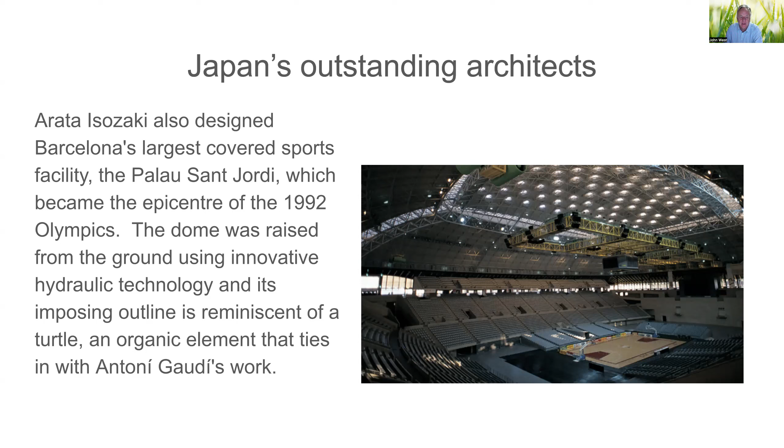Now let's move on to Arata Isozaki, another Japanese architect. He designed Barcelona's largest covered sports facility, the Palau Sant Jordi, which became the epicenter of the 1992 Olympic Games. The dome was raised from the ground using innovative hydraulic technology, and its imposing outline is reminiscent of a turtle, an organic element that ties in with Antoni Gaudi's work.

Now, someone else who's interesting is Kengo Kuma, another one of Japan's leading architects. He designed the stadium for the 2020 Tokyo Olympics, which of course was held in 2021 because of the coronavirus. Let's listen to some of his thoughts.

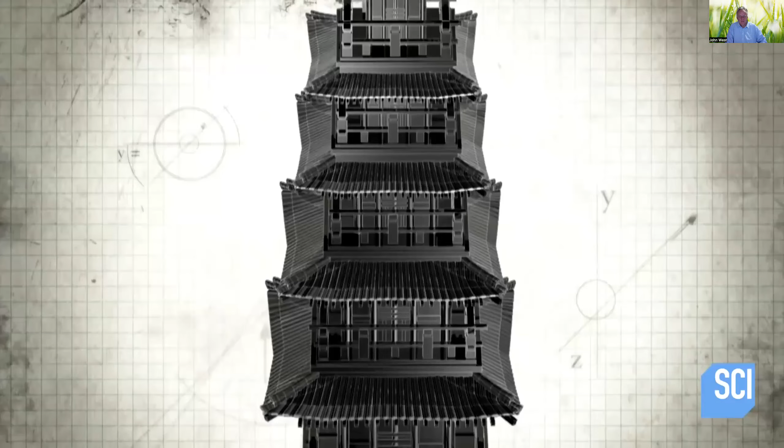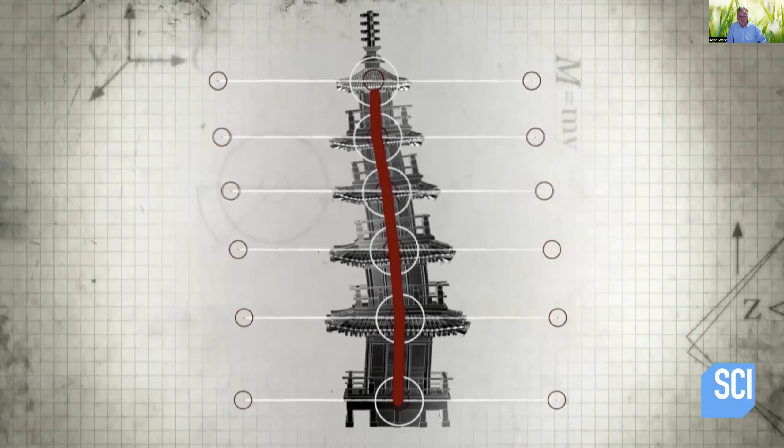In the Tokyo area, big earthquakes occur, and that is a challenge for us to design such a high-rise structure. To stabilize the tower, engineers rely on fluid dampers developed during NASA's Apollo space program and from something closer to home. The engineer's first step in controlling the shake of the tower centers around an ancient earthquake-proof structure called a Japanese pagoda. A flexible earthquake-dampening central pole called a shinbashira stabilizes this tiered wooden structure.

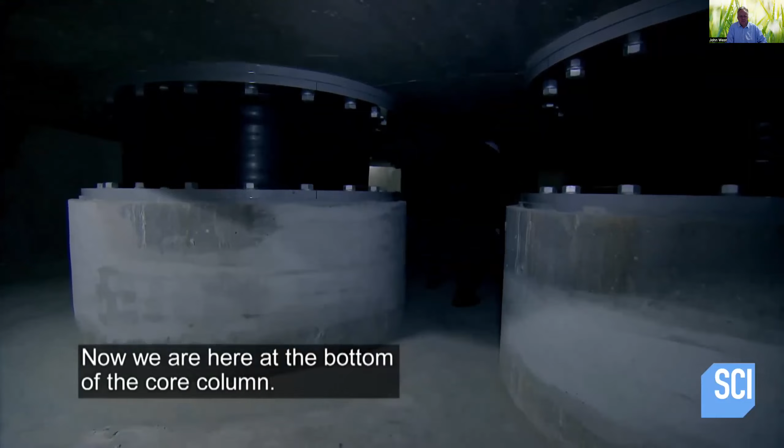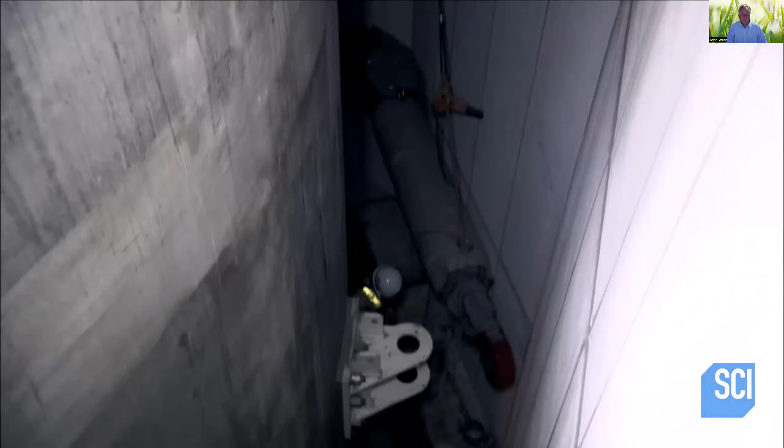Skytree's engineers are emulating this ancient technology, creating an enormous 1,200-foot concrete column set on 6 giant rubber bearings. We are here at the bottom of the core column. I came up with the core column system because there is a shinbashira in Japan. Sandwiched between this mass and the tower's steel structure lies the Apollo-inspired fluid dampers.

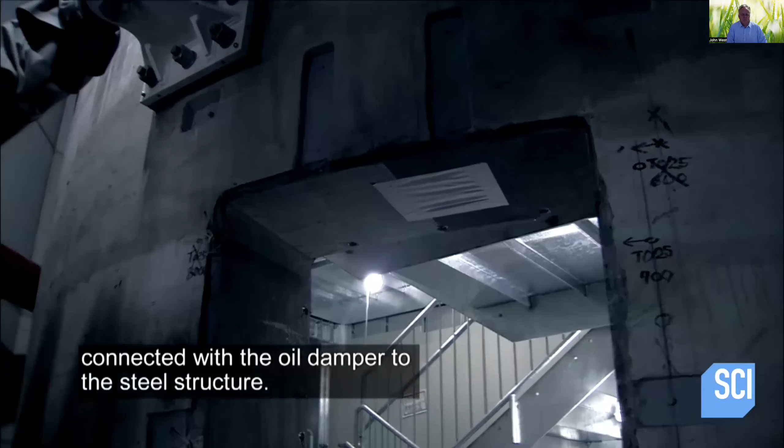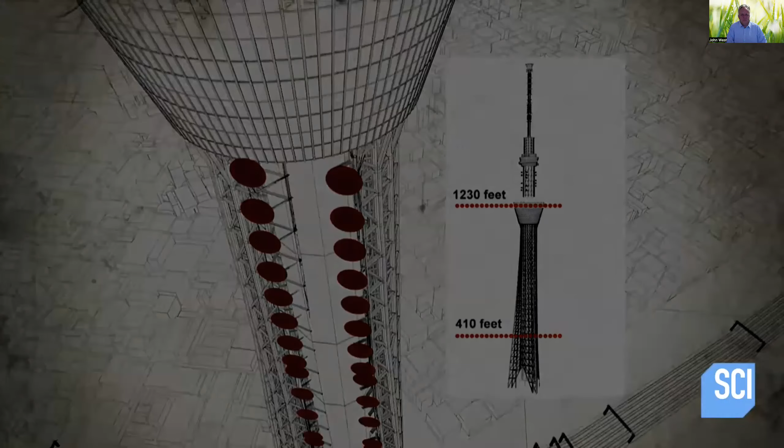The upper half of the core column is connected with the oil damper to the steel structure. Situated between 410 and 1,230 feet, the series of fluid dampers control the movement of the freestanding 11,000-ton concrete core and the steel exoskeleton throughout a seismic event. During the earthquake, the core column is designed to shake just a little bit slower compared with steel towers. That condition is the reason why the core column system reduced the vibration of the Tokyo Sky Tree.

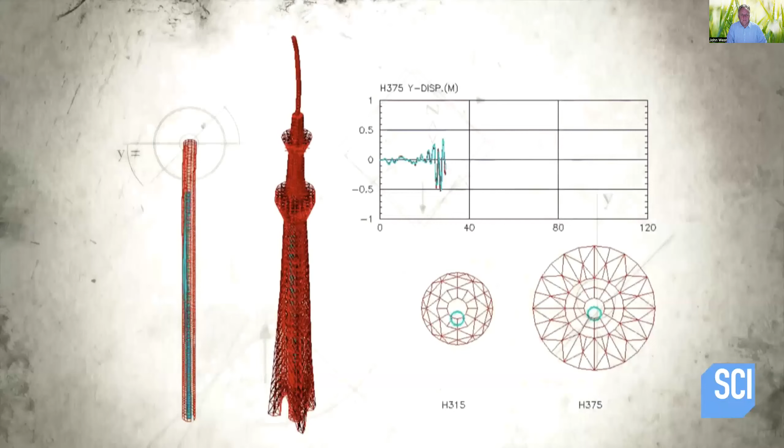The different vibration cycles of the central column and steel frame can counteract the vibration of the entire tower. If the oil damper isn't installed, the core column will collide with the steel structure and the core column will collapse.

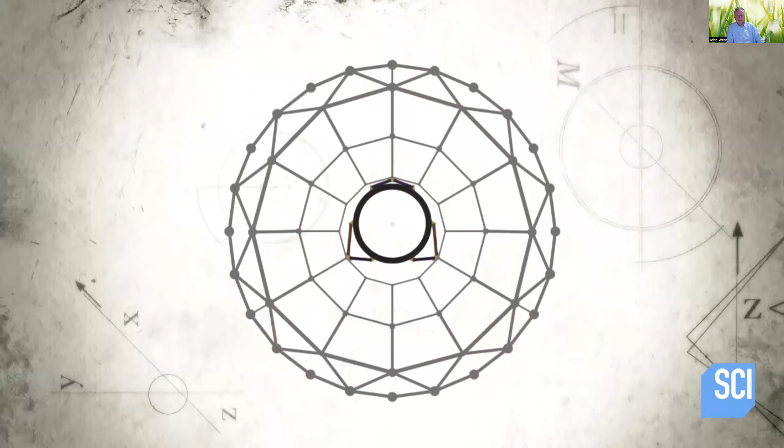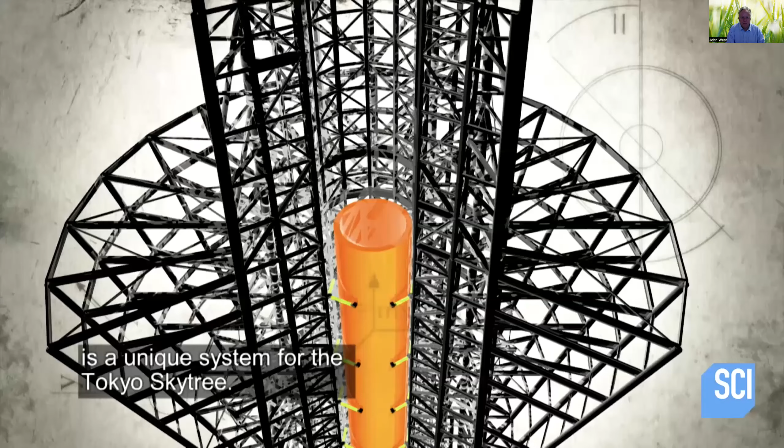The system is so effective it reduces an earthquake's vibration by 50%, meaning Skytree will survive Tokyo's most severe seismic activity, the likes of which is only expected once every 1,000 years. The vibration control system is a unique system for Tokyo Skytree, the first one in the world.

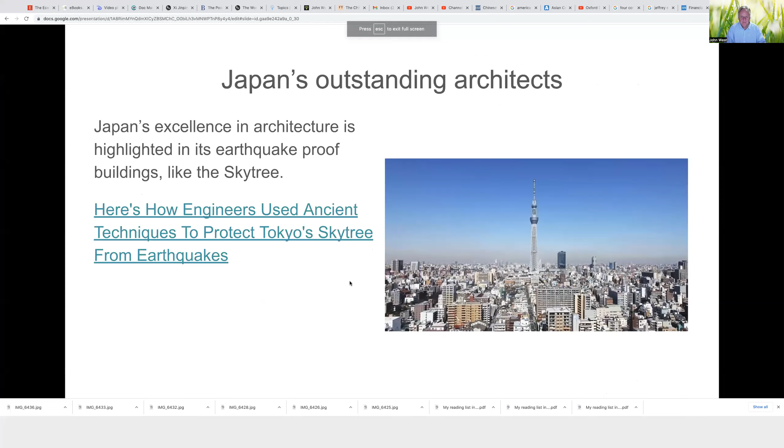So let's have another look at some...

Next in Tokyo, Japan, we'll take a look at the construction site of Tokyo Skytree, the tallest broadcasting tower in the world. Our correspondent spoke with the designer of Tokyo Skytree on how it was built to resist even the strongest earthquake in the country.

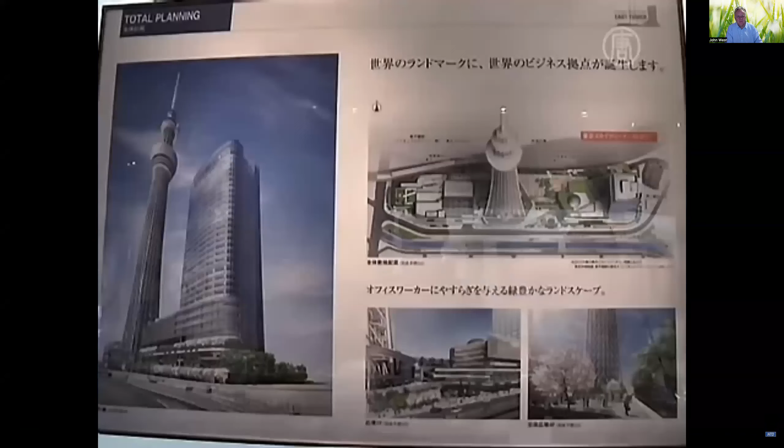Tokyo Skytree will become the world's tallest freestanding broadcast tower and is revealing its secret in overcoming earthquakes in quake-prone Japan. Standing over 630 meters high, Tokyo Skytree was designed by Nikken Sekkei, a Japanese architecture firm experienced in building quake-resistant high-rise buildings in Japan.

The company developed a system of adding mass as a balancing weight to buildings to control how they sway during an earthquake. For the Tokyo Skytree project, the emergency staircase situated in the core of the tower acts as the mass, controlling sway during an earthquake. According to Nikken Sekkei, it's the first in the world.

The core column and the surrounding steel frame are constructed separately. Therefore, when it shakes from an earthquake, they will shake in different ways. This system works by utilizing their different ways of shaking to repress the overall sway.

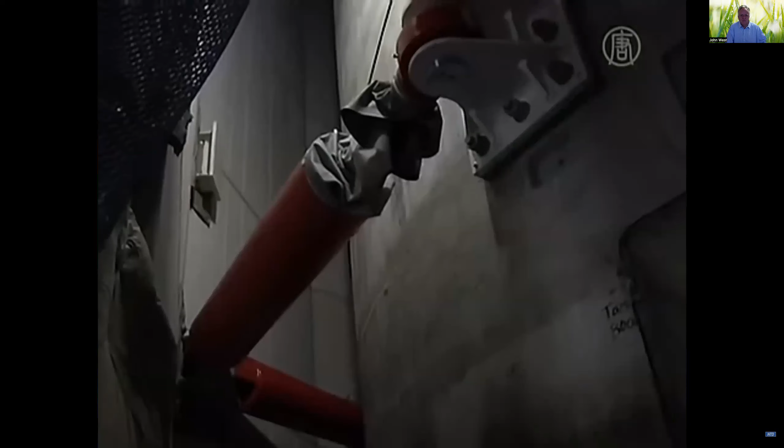These act as cushions and are able to absorb swaying up to 50%.

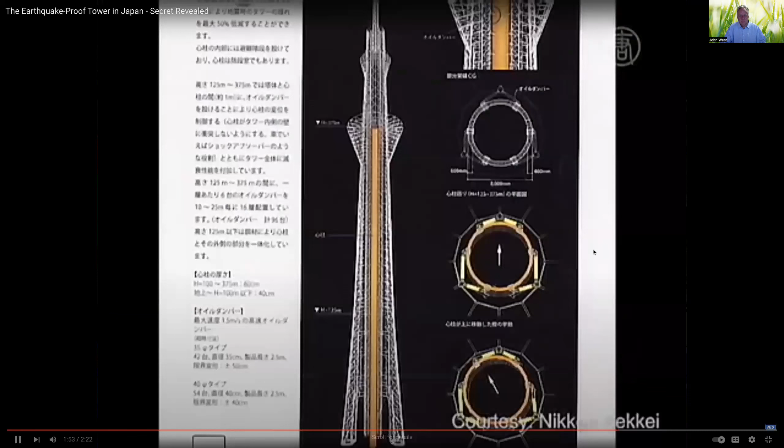The concept of using a central mast for the Tokyo Sky Tree was borrowed from traditional Japanese wisdom of building five-story pagodas. The longest standing pagoda in Japan is regarded to be at Horyuji Temple in Nara Prefecture, built in the 7th century. Tokyo Sky Tree will be open to the public in May 2012 as Tokyo's newest landmark and popular tourist attraction.

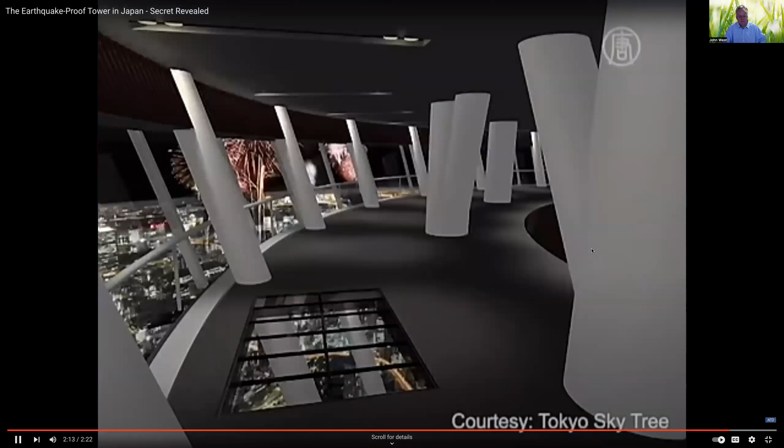Liliana Yap, NTD News, Tokyo, Japan.

So I have one last video on the Sky Tree.

I think as a humanity, we're always looking forward, but there really is an art in remembering what our ancient technologies have brought us and how they have stood the test of time.

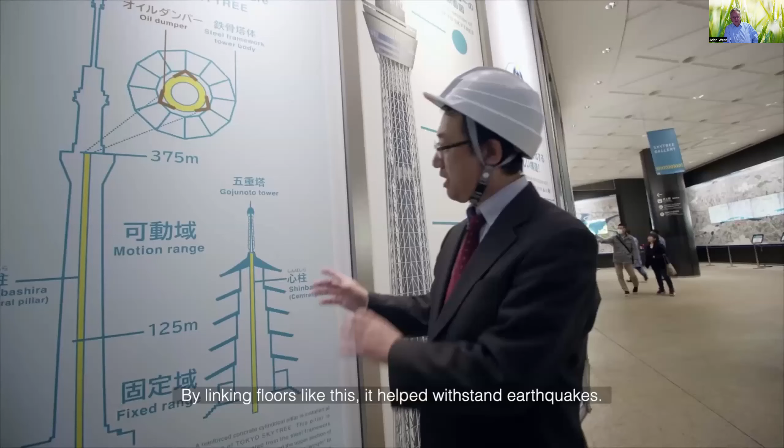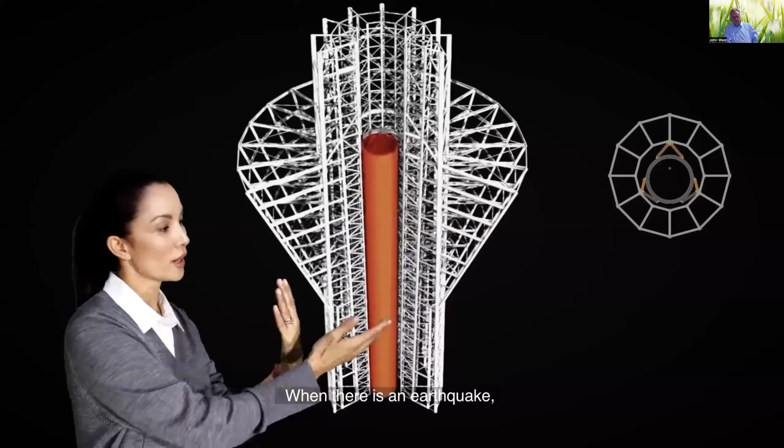Both the Shinbashira and the sky tree's oppositional sway slow down the vibration by about 50%.